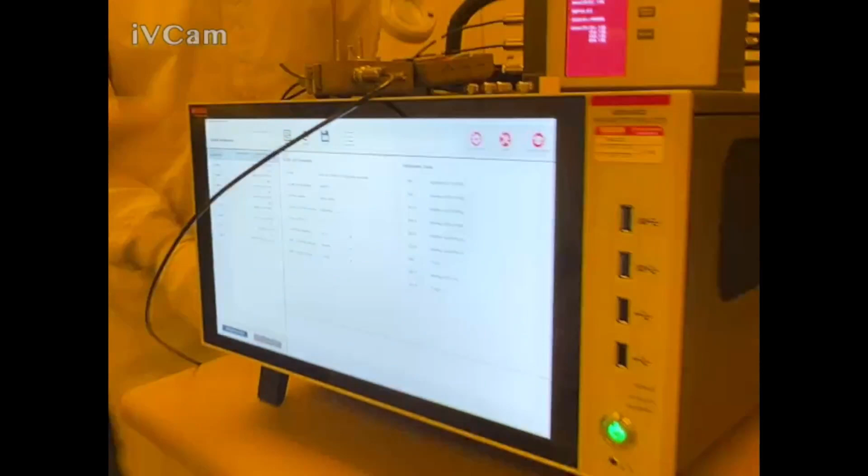Okay, that is right. So, looking at the icons here, there's several icons. Clarius, that's the main software. If you've used KITE, that's gone now. Clarius is the software you run on this. KCON, that's Keithley configuration, we got to do that once, and that's how we fix that error that popped up. So we run this KCON, and what it does is tell you everything that's in the machine.

So here's SMU 1, 2, 3, 4, 5, 6, CVU, and a ground unit. The little arrows mean you got preamps connected. Now the cool thing about this is I can select this guy, and if I think there's something wrong with it, I could run a self-test on it. I could do that on the preamps as well, open this guy up, go down to the preamp, and run a self-test. So I could test all the hardware out from here if I want to.

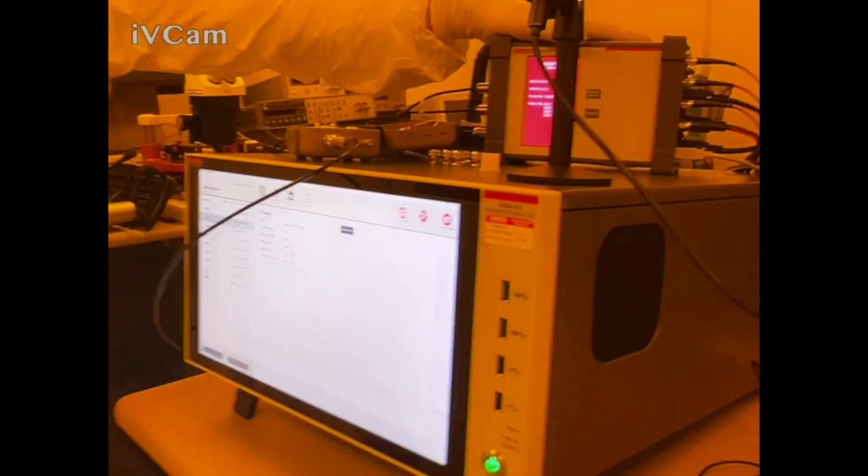So it found the CVU. It didn't find this, that's why it complained. It didn't find the CVIV. So what we got to do is say update.

So what we'll do—oh, and we got to disconnect our device or it'll blow it. It'll tell you that. So you say update, and it tells you make sure there's no devices connected, blah blah blah. And we'll run that. Now what it's going to do is update this, because the Clarius software utilizes the information from this so you can run your tests.

Okay, so you'll see it's going to add a CVIV in here somewhere. Nice. So now look, here's what CVIV is. These are the sense lines, not the 4-wire sensor. I'm not going to do any 4-wire right now, but look, now we got CVIV there. So now all your hardware is identified.

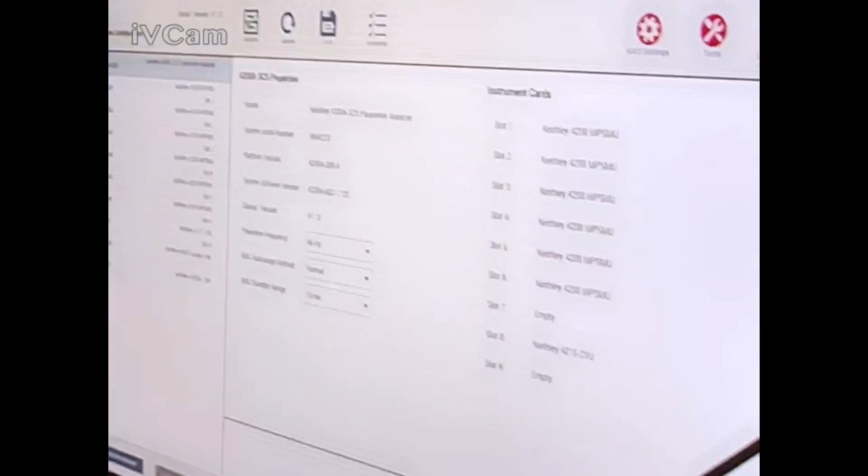So now what I got to do is hit save. You should never have to do this again unless you take something out or add something, and it'll squawk at you—it'll say oh, something's wrong. And then you just run KCON again, and you save it, and you get out of here.

And then there's K-pulse, you're never going to use that because you don't have a pulser. That's to generate pulses. KULT is an IDE for writing your own tests, so you can custom write your own automated tests. Most of the tests in here are already done for you, but if you want to write your own, you can—that's how you use KULT for that.

KXCI is for the GPIB. If you want to talk to this via another computer using GPIB, you'd have to invoke KXCI, which turns this from being a controller to being a listener—makes it just another dumb instrument, like any other instrument you got here. So you got to run KXCI, and it turns around the bus.

Okay, we don't care about any of this other stuff. The Learning Center, this is good stuff, there's a lot of information here. Before you call me, dig in here, because there's a lot of stuff.

There's all kinds of information in here for all the different types of products. Okay, so let's get out of there. So here, you've got all the manuals, the data sheets. There's even videos explaining things like grounding and shielding and all that. It's all in here. Okay, so I'm going to get out of there.

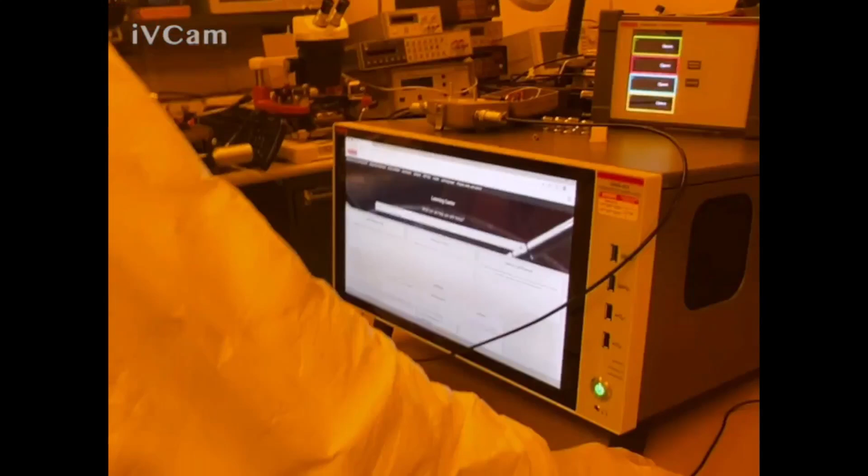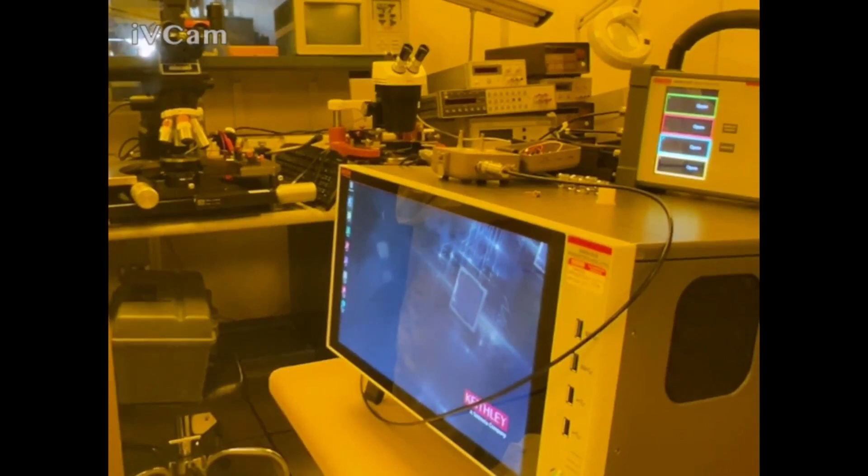Now, Clarius. That's the main software. I run that. Come on, run. There it goes.

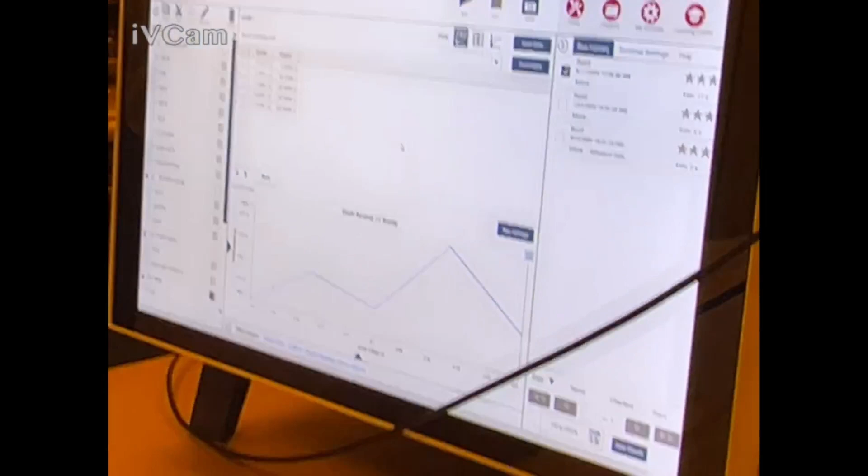Okay, this is where you're going to do your work in Clarius. Okay, so this is the guts of this machine. There's three things. I'll remind you, this is a touch screen. I don't like the touch screen, but it's all touch screen. It'll pinch and zoom like your phone, all that stuff, right?

So testing is 3 steps. You're going to select what you want to do, you're going to configure the test, and then you're going to analyze the data. Okay, so it's a 3-step process.

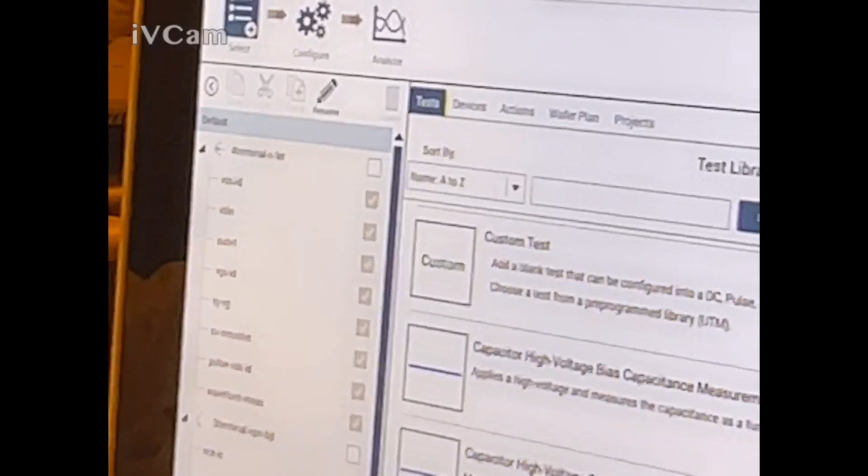So first thing you're going to do is you're going to select. Now, I've got a project already set up over here. It's called the default project. You can create your own. The default project has all my demo devices, right? So that's why it comes up to default.

So VDS ID, yeah, so you've got your VDS ID, your threshold, linear threshold, your sub VT, you've got VGS ID, IGVD, you've got CV for a MOSFET, which is gate capacitance. You've got pulse, which you don't have the hardware for, so you can't do that. And waveform measure, you also need the hardware for that.

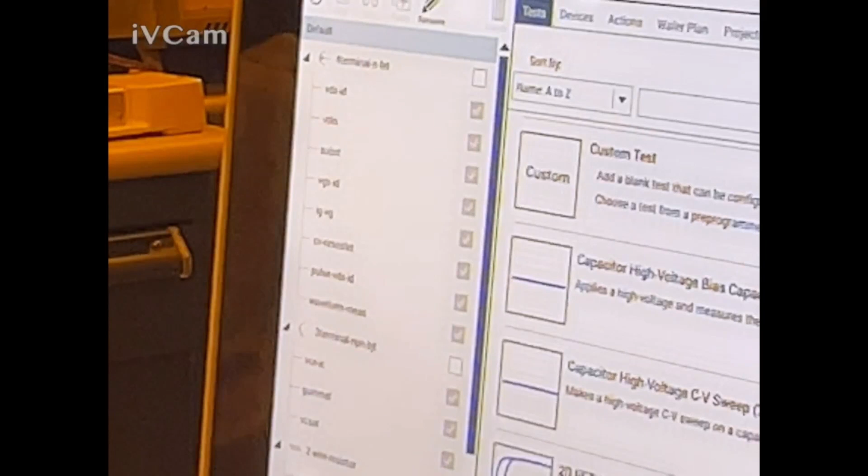Okay, so what I can do with this project is I can set this up however I want. Mine is default, so I can have devices. You can see I've got different devices in there. And then under each device, I could have different tests. And I can put that all in one project, which probably doesn't make sense, but for this, it makes sense.

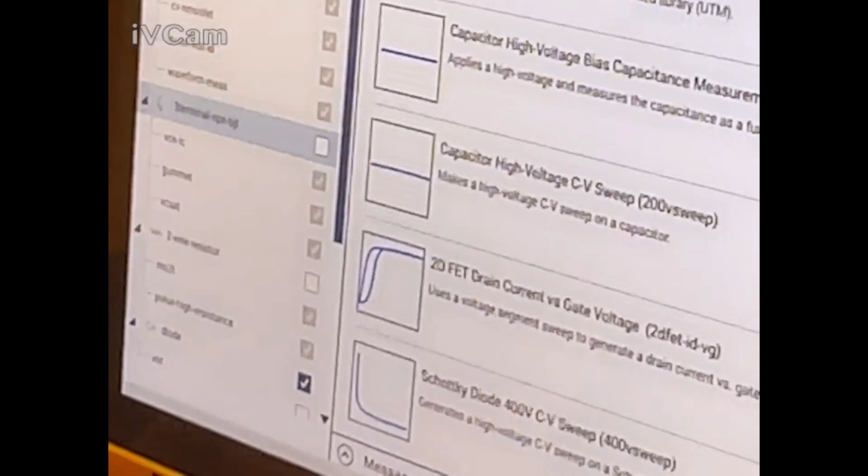Typically, you'll have a device you want to test - that'll be your project, and you'll put all your tests under it. You have another device, you'll create another project. So you have diode, two-wire resistance, you have diode, capacitor.

Okay, so this basically covers, this is an example for all the different types of tests you're going to be doing. Do you have something for inductor as well? Inductance is calculated, okay? And that's all done through the CV meter.

I can show you that, okay? So here's all your devices. Now, if I go to my 4-terminal FET and I go to VDS ID, that's usually where I start.

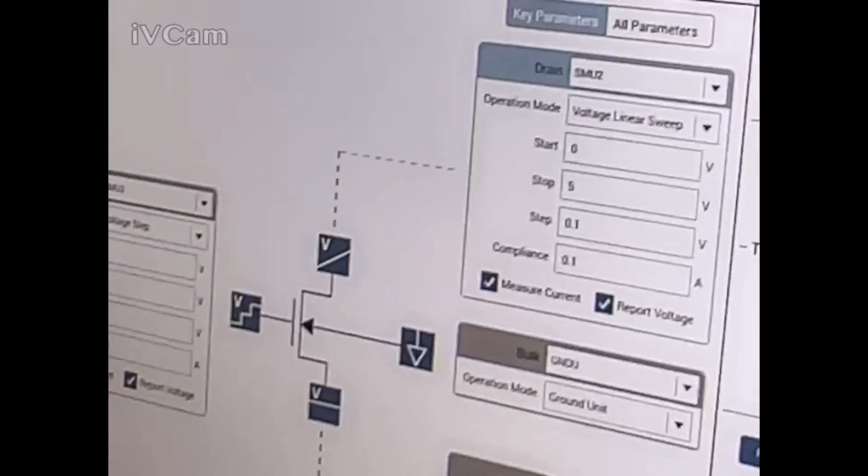And I go to configure. Now this is where I set up my test. Okay, so this means nothing, it's just a bitmap. I could put a picture of my kids there if I wanted to. It doesn't matter. What matters is what you do on each pin.

Okay, so I could test a resistor from this screen. It doesn't matter, whatever this shows doesn't matter. What you do here is what matters.

So now this has got a little icon that shows you kind of what it's doing. This is showing you a ground, so it's using the ground unit, which we don't have. We're not going to use that. So what I'm going to do is say none - I'm not going to use the ground unit.

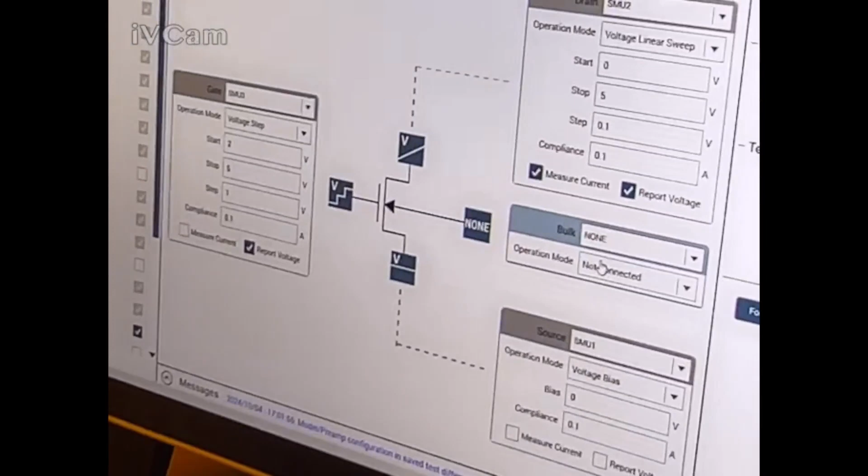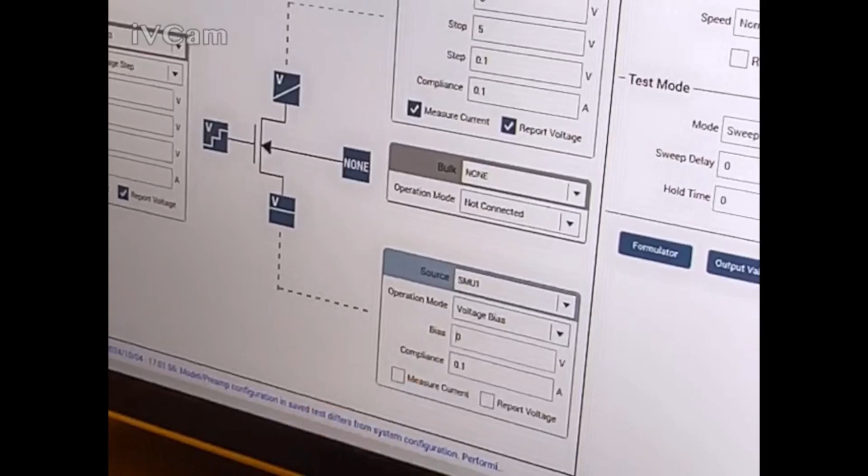This one's showing just a bias, right? So this is, remember I said use the SMU for ground, right? Yes. So voltage bias of 0 volts - that's why I don't like the touch screen when I'm demoing, I do that all the time. So I could set SMU1 to 0 volts, and I set a compliance. Now that's my ground, okay?

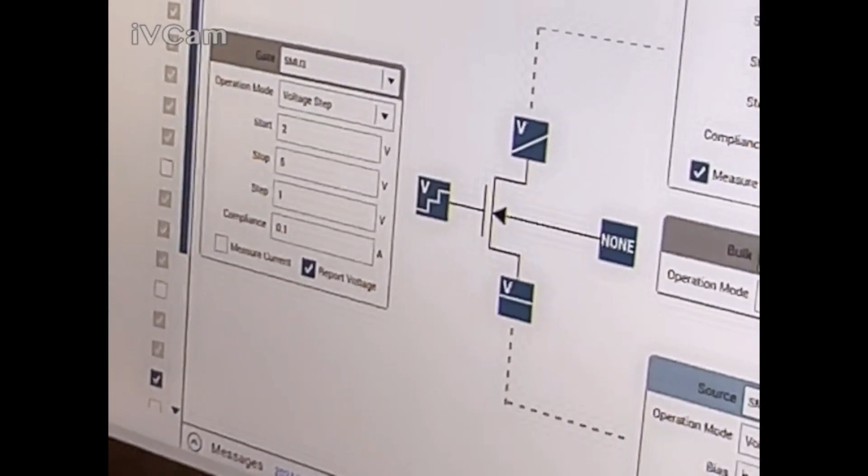This is showing me a step function on the gate, so this will give me a family of curves where you get multiple sweeps, right? At different gate voltages. And this is showing me a linear sweep. So for every one of these steps, I'm going to do a linear sweep, a complete linear sweep.

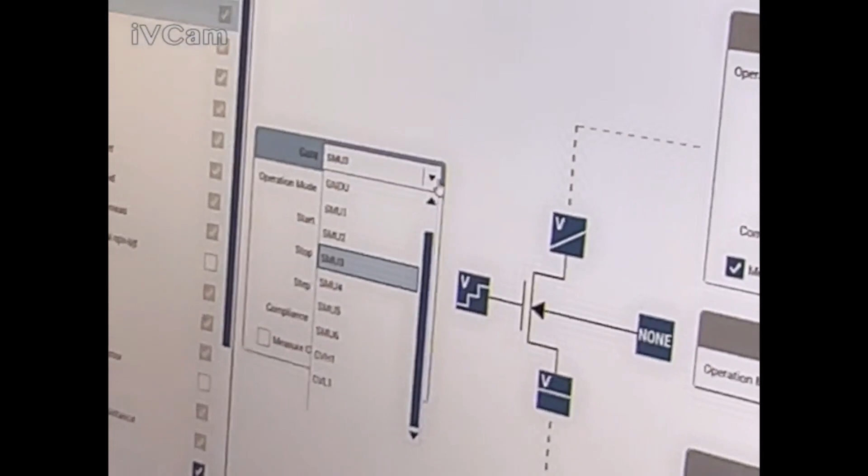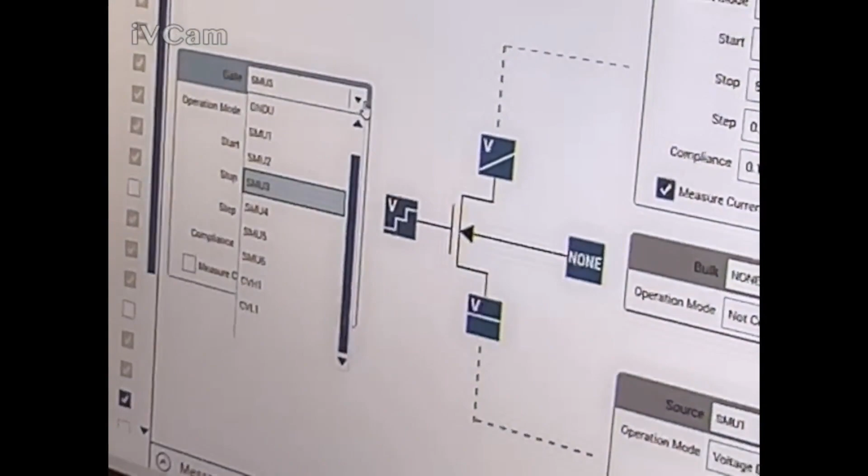So first thing is, what hardware do I want to tie to that pin? Now I matched everything to my fixture. This is something you got to be aware of. You got to make sure the proper hardware is tied to the proper pin of your device. So this is all set up for me. SMU1 is my source, so SMU1 goes to the source. SMU2 is my drain, so SMU2 goes to my drain.

Oh, I got to put my device back. What if you don't have that fixture, how do you measure a device then? Well, use your probe station. That's one way to get there, using a triax to alligator clip cable. Or there's several ways you can do it. You could put an adapter on here, convert the triax to BNC, then use a BNC to an alligator clip or something like that. However you gotta do it.

What is the easier solution? The easiest solution, I mean, you really don't want to do your testing that way if you can help it. We need correct results as well. It's nice if you got shielding. You just use cables in the air, if you're trying to make sensitive measurements, it's hit or miss. You might get something, you might not. So the best way to do it is to use some kind of fixture that has shielding. That's a fixture, you get it inside the box, you close the door, and it's shielded.

Now the other thing I didn't mention is you got to wire this up to your enclosure, because this will only put out 20 volts unless you wire it to your enclosure for safety. So it has an interlock. When the door's open, it shuts this off so that nobody can get hurt, because this could put out 200 volts, so it could hurt somebody pretty bad. So right now, if I tried to turn this up over 20 volts, it'll balk. It'll say, nope, sorry, can't do it. No interlock, because it's not wired.

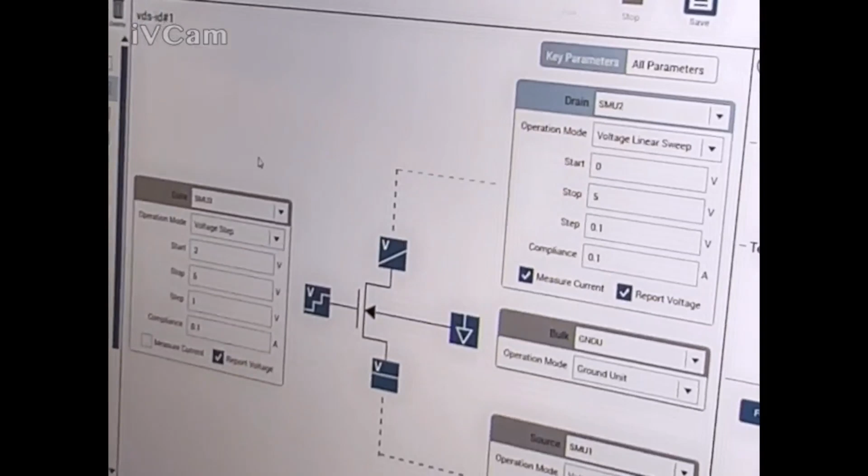So your enclosure has a switch in it somewhere, it should, right in the bottom. And that switch has to be wired into the back of here. There's a cable that came with this you should have, it's a gray cable, that's the interlock cable. If you don't have one, I can get you one. So this should be all set up to work, I shouldn't have to touch anything. So that's another warning to you: try not to mess with these because they work. Leave them alone. If you change something, don't save it, because you'll be overriding something that works.

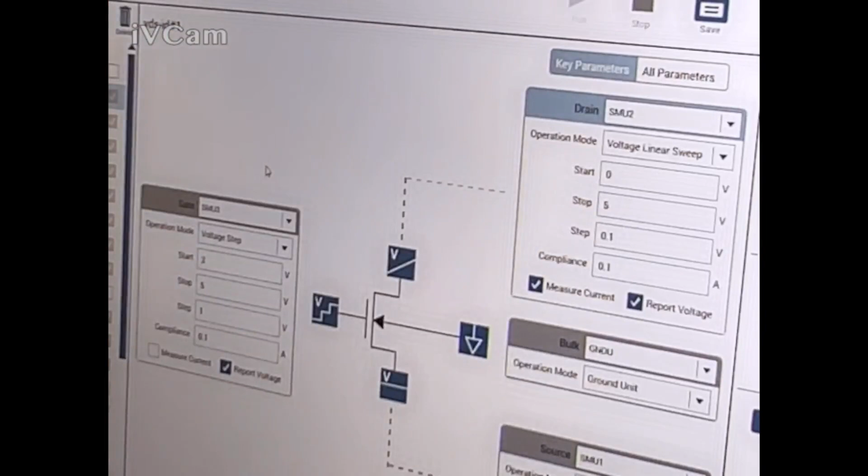So what do you mean? Don't change the numbers, don't change anything, leave it alone - start, stop, step, leave it alone. Besides, this is a good way to test if everything's working, because it's using three SMUs at once.

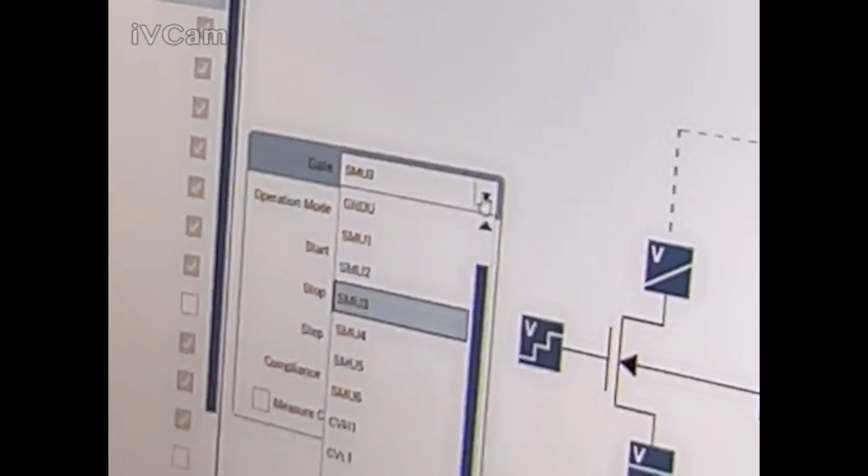So basically, here's what you got: you got your hardware, so this comes from KCON. So any hardware that's in this box, you can put on that pin. So you got to tell it what you want to put on that pin. I'm going to put SMU 3 because that's what I'm wired to. So I could put the ground unit, I could put any of the SMUs, I could put the CV high or CV low. But since I'm trying to do a VDSID, I want to put the SMU there.

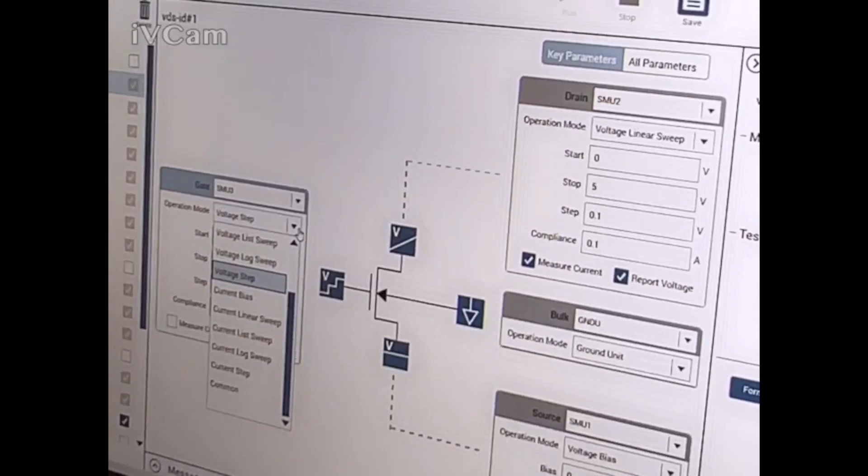So then this is going to be - I have a mode, these are all the different modes. So what we know about SMUs is they could be anything you want them to be. It could be a power supply, it could be a sweep generator, it could be a current source, it could be a voltage source, it could be a current meter, a voltmeter. So I got to tell it, how am I using that SMU? In this case, I'm going to use it as a voltage step. I could use it as a current step, I could use it as a ground, I could use it as a list sweep, which you put in a list of values, and it goes through the list.

I could do logarithmic sweeps. I could voltage bias it, which makes it a power supply. I could leave it open if I want. I could do whatever I want with this, but I want it to be a voltage step because that's what you do for a family of curves test.

I'm going to start at 2 volts, stop at 5 volts, with a 1 volt step. So that means 2 volts, 3 volts, 4 volts, 5 volts. I should get 4 sweeps, right?

Compliance, that's to protect your device. So you set a current compliance. If I'm sourcing voltage, I'm setting a current compliance. If I'm sourcing current, I'm setting a voltage compliance. Compliance is always the opposite function of what you're sourcing. So that just says the source will not put out any more than 100 milliamps, so it will protect your device. That's what that's for.

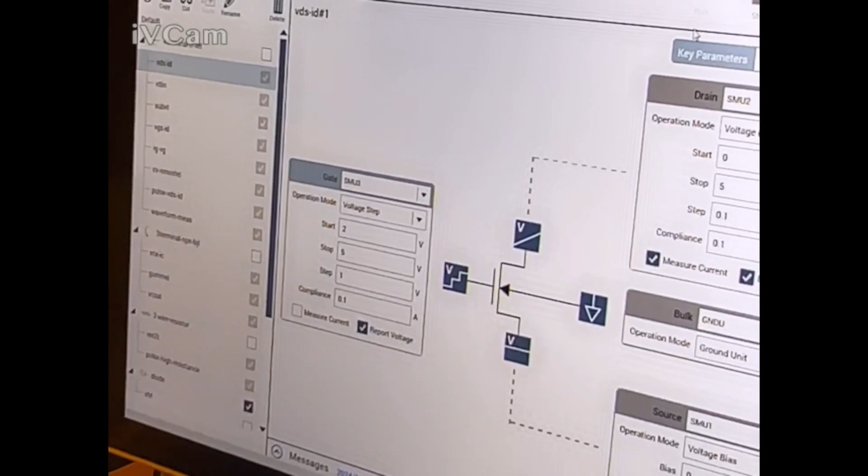Now, every SMU has 2 A to D converters on it per channel. So what does that mean? I could measure voltage and current at the same time because I've got 2 A to D converters. So I could say measure current and voltage, boom, it'll give them both to me. I'm not going to do that here.

Why? Because what do we know about gate current? It's very small. What did I tell you about settling time? It's going to take forever. So if I measure that current, I can do it, but we'll be sitting here for 5 minutes for this test to complete. So I'm not going to do that. We don't care about gate current, right? We don't really care about it. What we care about is drain current. So over here in the drain, I'm going to measure current and voltage because that's what I care about.

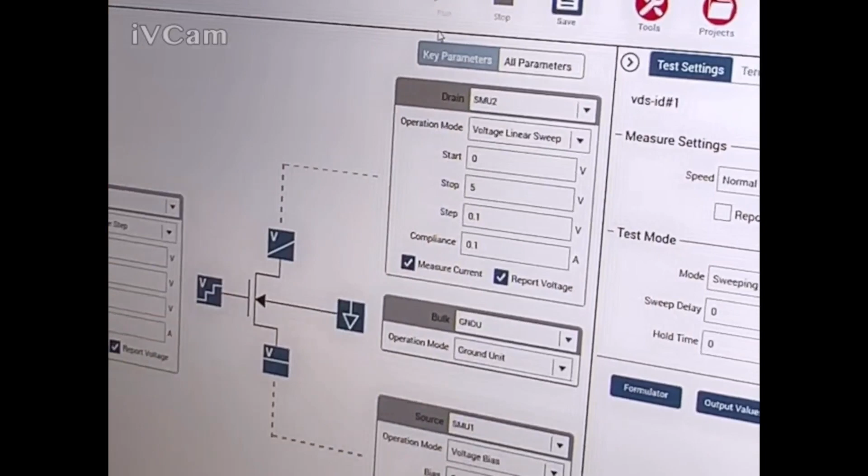And I'm going to do a sweep from 0 to 5 volts with a 0.1 volt step. We want more resolution on the drain current because that's what we're concerned with. And then this guy is just a ground - I don't have to measure anything. This is just a ground. There's no reason. I could if I wanted to, but there's no reason to.

I talked about the speed. Here's the speeds - these have to do with the NPLC settings I talked about. When we say normal, that's 1 NPLC, 1 power line cycle. Fast is 30% faster, quiet is 30% slower. Custom, you can set it to whatever you want.

Okay, sweep delay and hold time. Sweep delay is delay that it adds after every source change. So every time it steps a voltage, it's going to wait that long. That's like if you've got a lot of capacitance on your device or in your fixturing or whatever, you might have to wait a little bit for it to settle. So you can do it that way, or you can do it with the NPLC.

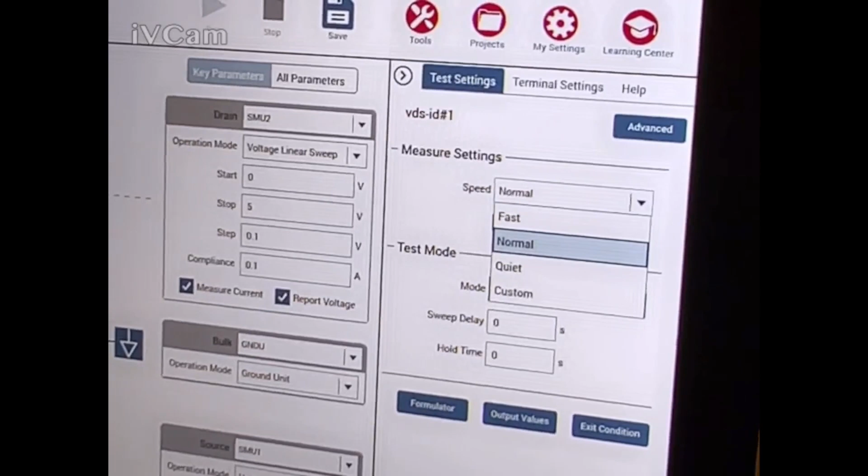It depends. So you're sweeping the gate... no, we're stepping the gate. We're stepping, the sweeping is on the drain, okay... sweeping, hitting the drain, the whole drain. Okay, so for every step, we're going to have a full sweep. Okay, I see. Okay.

Hold time is time before any of the test starts. At the beginning of the test, you can set a hold time.

Now, the total time of your measurement is 3 processes. There's source timing - there's overhead to set the source up. I don't know what that is, it's indeterminate. We don't care because this is DC. We care about current and voltage, we don't care about time. So there's timing related to that, and it's going to vary based on range. That's why we don't care - you can't keep track of it.

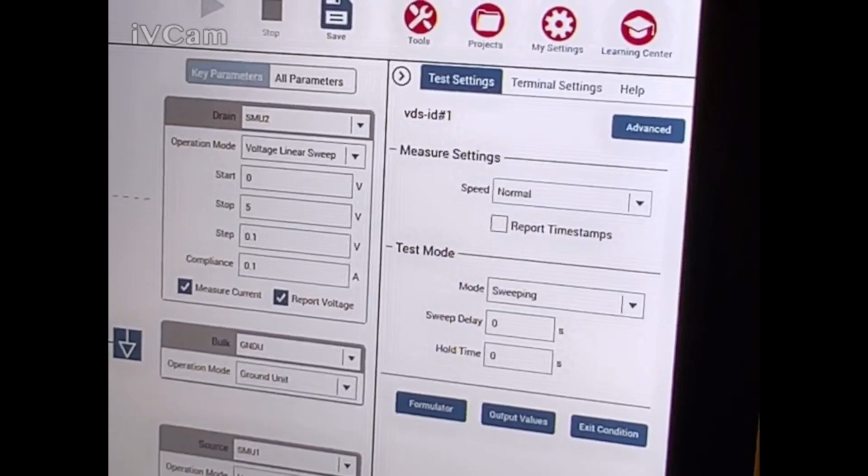Then there's delays that you add, like this sweep delay, hold time. Then there's the NPLC, the measurement aperture. Those 3 together give you your total time. Now, if you want to know what that time is, simply hit this: report timestamps. And what it'll do is put a timestamp on every measurement, so you can see how long it's taken for every measurement. That's the only way to do it with the DCSMU. With the pulser, it's much slicker and much nicer. But with this, timing's kind of secondary. We don't really care about timing, but sometimes you do care.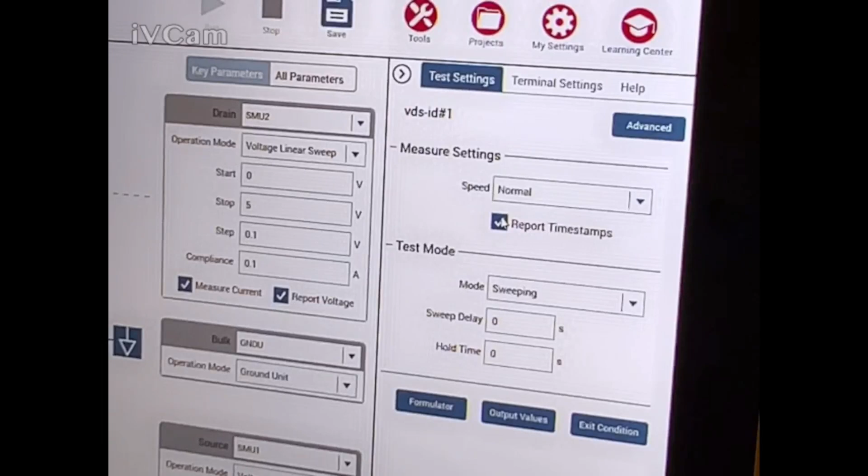If you set the timestamps up and measure very quickly to where you're getting that noise, you'll see the current settle. By looking at the timestamps, you can see how long it took to settle, and you know how much delay to add if you need to. But as long as you keep speed normal, you probably don't have to worry about anything. You're probably good.

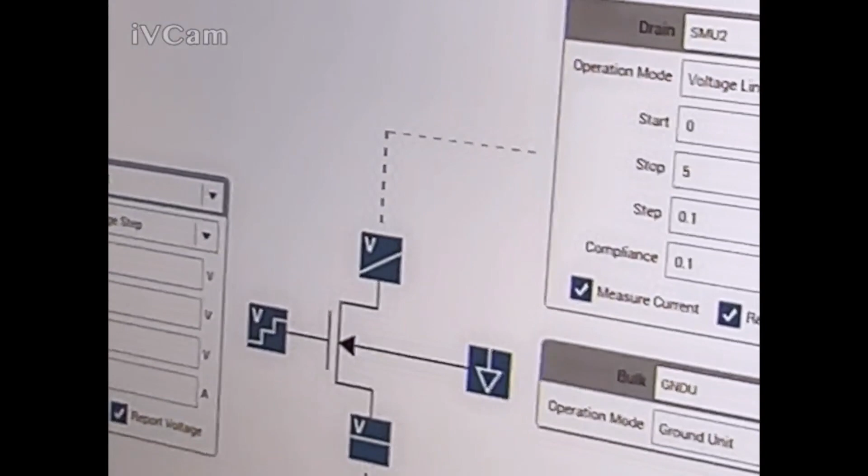Bulk, you said earlier it should be none, right? Yes, it's none or ground. Oh, it's the same? Oh, that's because I powered it down, I forgot to change it. Yeah, it'll fail when I run it, so I can change it to none. So now we got nothing on the bulk. So this should run now. Now I could go to analyze.

This is what I should get. I should get four sweeps, right? I'm gonna run it. So what is that curve again? Where did you get that curve from? From a previous measurement? Yeah, it's factory installed.

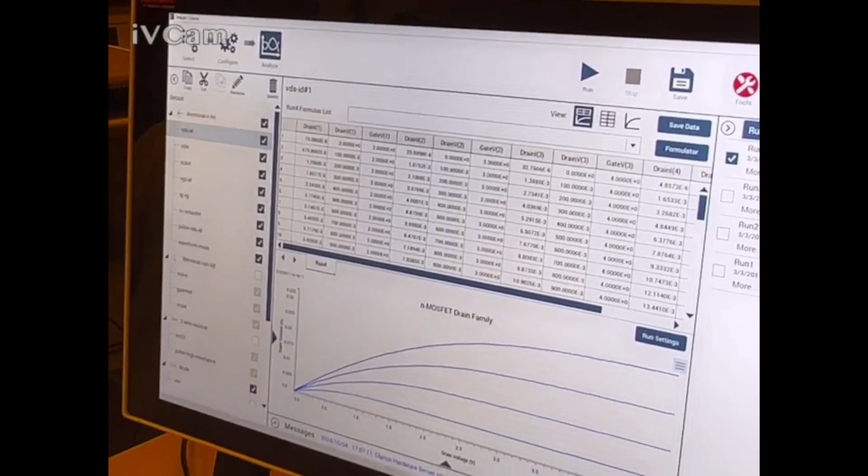I see. Okay, so I have to have these selected in order for them to run. Now, if I go up here to 4-terminal NFET, I'm gonna show you something. This is actually gonna fail, and I'm gonna show you that, but I'll explain it.

This is gonna fail. Save changes. What did I change? So even without hitting run, it took a measurement, right? No, just analysis, that was already there. So it keeps - see, it was run 4 times. Nothing ever gets thrown away.

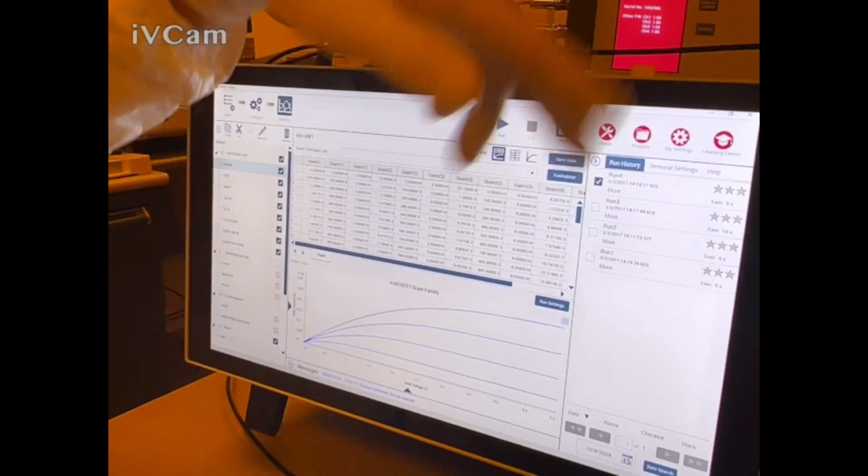So this was run at some other time, maybe at the factory, or something, right? The data's just there. You can turn it off by just clicking this button. You can turn it off. Okay, so that's what we should get, but we're not going to get it, and there's a good reason for it. I'll explain it because we forgot to deal with this. Ah, that's an error.

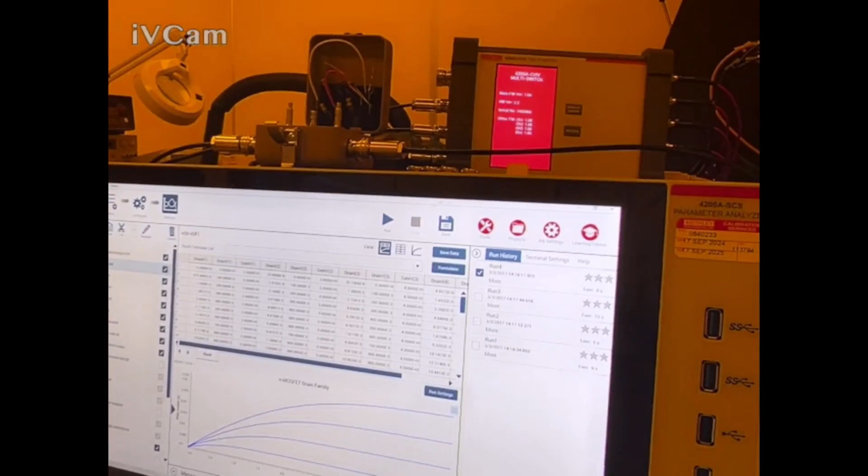So that's in the loop, and if I run this now, it's not going to give me anything. Watch. Yeah, I was actually - it's not going to work. I'll show you what we got to do. See, it's just junk.

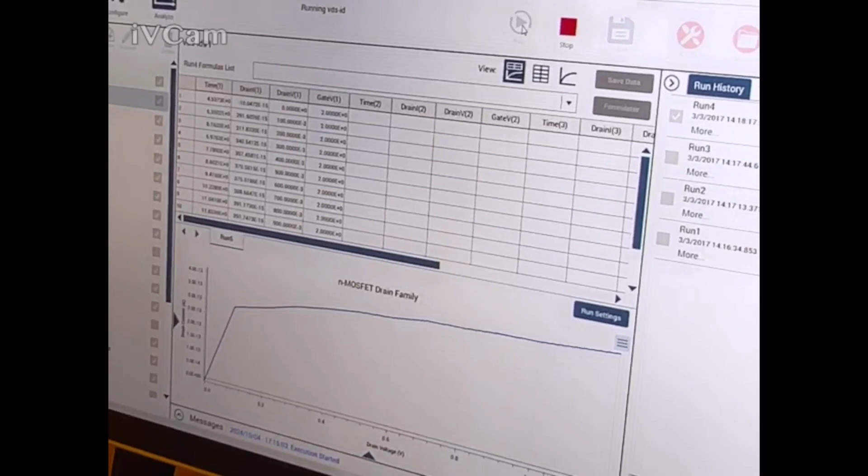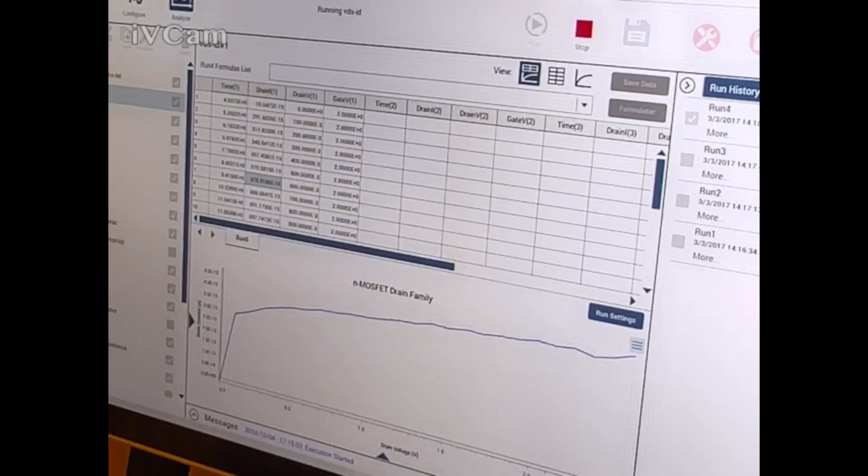Notice it's taking long because look at the current - it's femtoamps. There's no current. So that's why it's so slow. That's why I didn't turn on the gate current. So let's stop that. But okay, anyway, we got to set this up.

Oh, actions, there it is - CVIV, it's got to be configured. CVIV configured. Okay, so what I'm going to do is add that, and I'm going to put it up here. I'm going to put it right before the test. Okay, now I'm going to go to that.

Okay, so we have to tell it how we want to use this. Right now we want to use it in SMU mode, not the CV meter - we want to use the SMUs. That's your choice, CV or SMU, right? So we got to tell it what we're going to do. Channel 1 is SMU, channel 2 is SMU, channel 3 is SMU. We don't have a 4, so we say open - 4's got nothing. 2-wire or 4-wire? We're 2-wire.

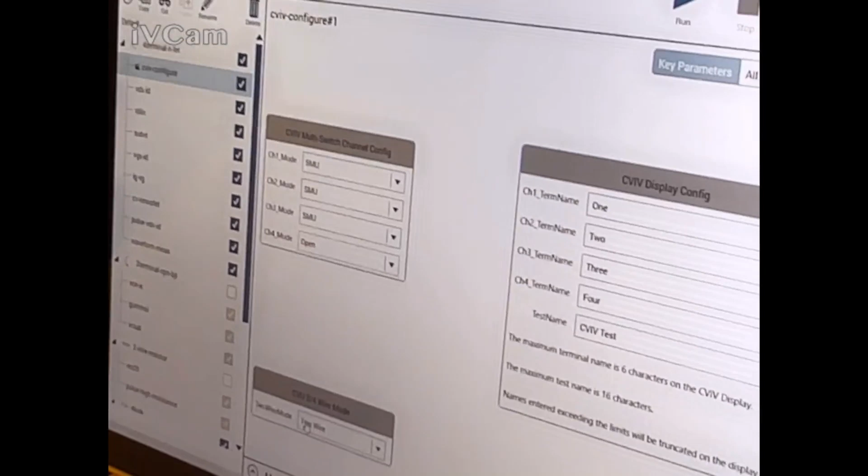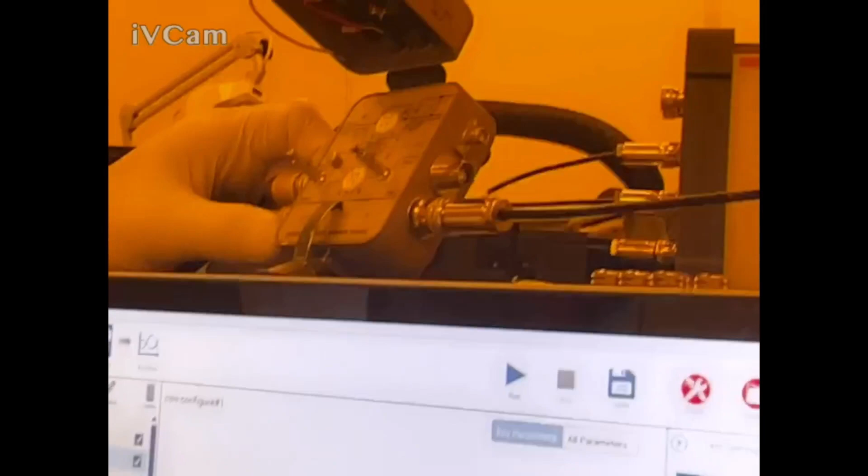Now, the other cool thing here is I can go over here and say channel 1 is my source, and I can type in here, source. Channel 2 is my drain. Channel 3 is my gate.

Okay, and channel 4 is open. Not using it. We have to do that every time, right?

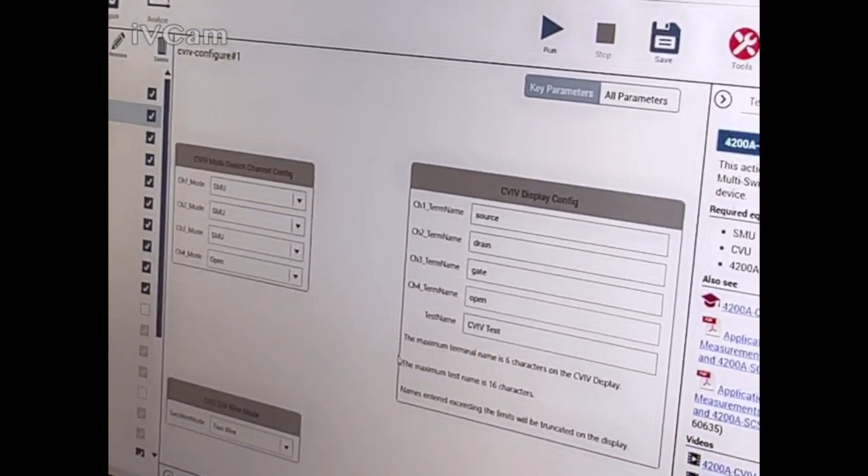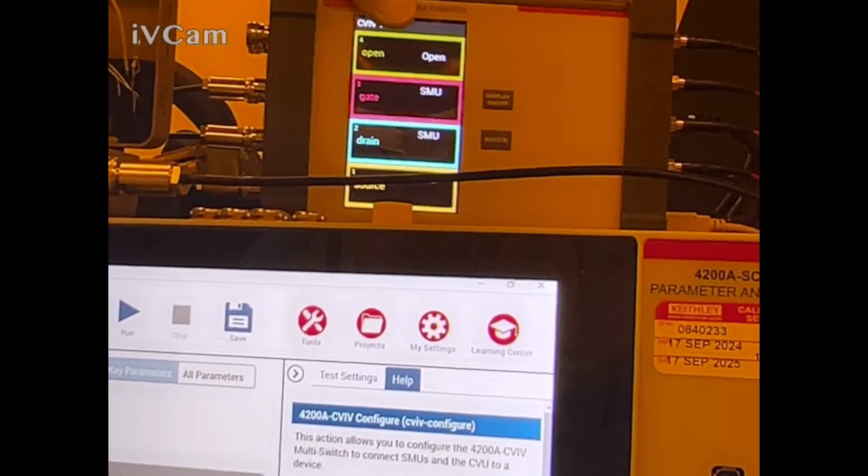No, no. I'll show you. I'm going to show you this. Another 2-wire. So now if I run this, watch what happens to that guy. Okay, now it knows. Now you can see exactly what's going on.

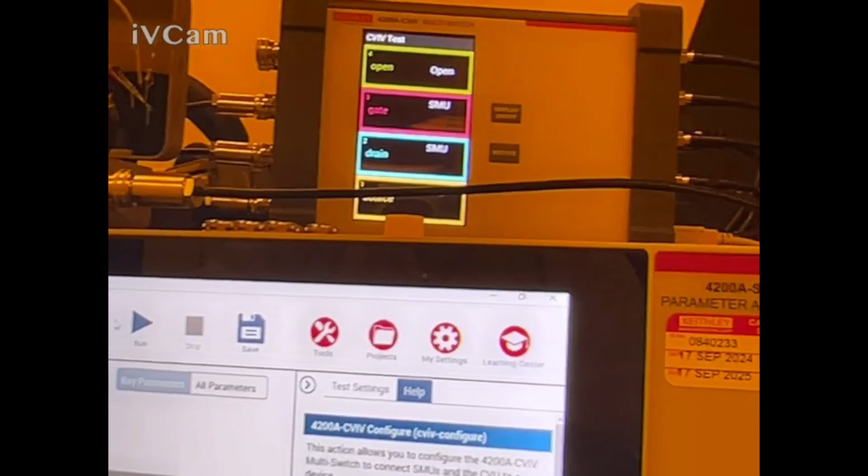So your channel 4 is open. You got a SMU on the gate, a SMU on the drain, and a SMU on the source. Now I can use it. So now that test is there. I would save that with my project, and now I don't have to run it again unless I want to change device or test type.

What if I wanted to go do a CV test now? I got to reconfigure that. But I'm going to show you how to do that in a semi-automated fashion. So now that's set up.

So now I can go back to this test, and I can run this test, and it should work. There it is, yep, okay. Now I'm going to show you something. Say you just walk up, everything was powered off, this it doesn't know where it's at, right? Everything's powered. See how fast that ran? If I turned on that current, it would run forever.

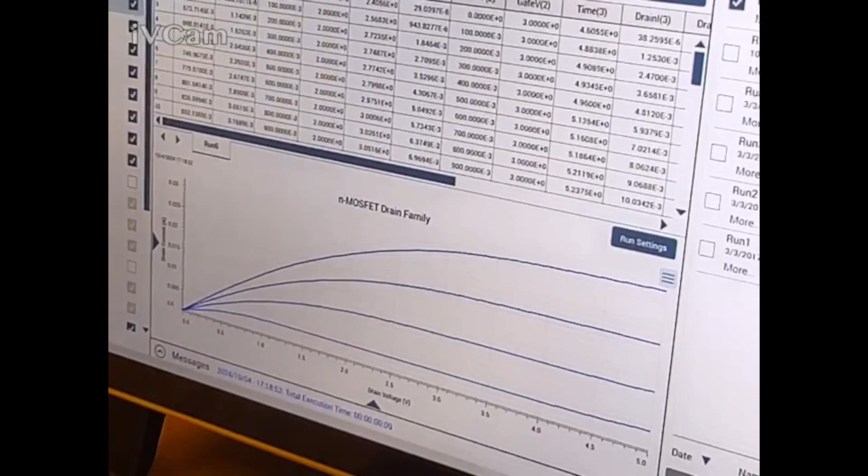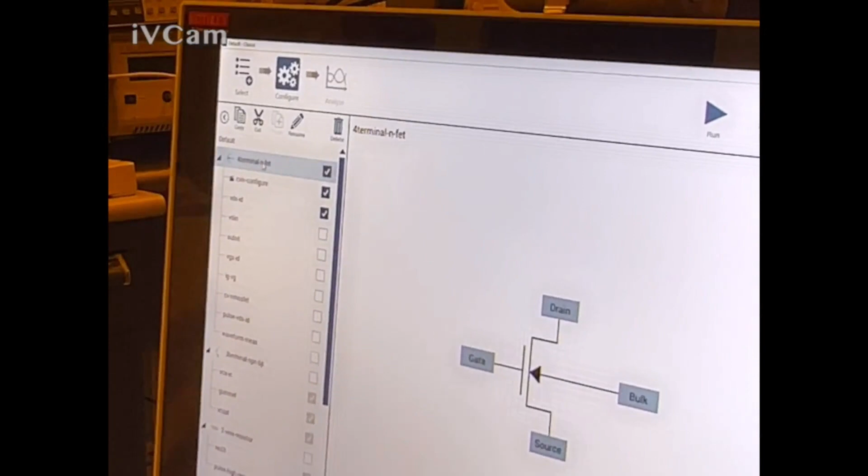But now what I could do is go over here and leave these 2 checked, and turn off all these other things under that device. So if I run at this level, it's going to run everything that's checked, so it's going to do the configuration of the CVIV and the test. Make sense? Then I could put another configure, do a CV test, and run them all 4, one after another, or run them all together.

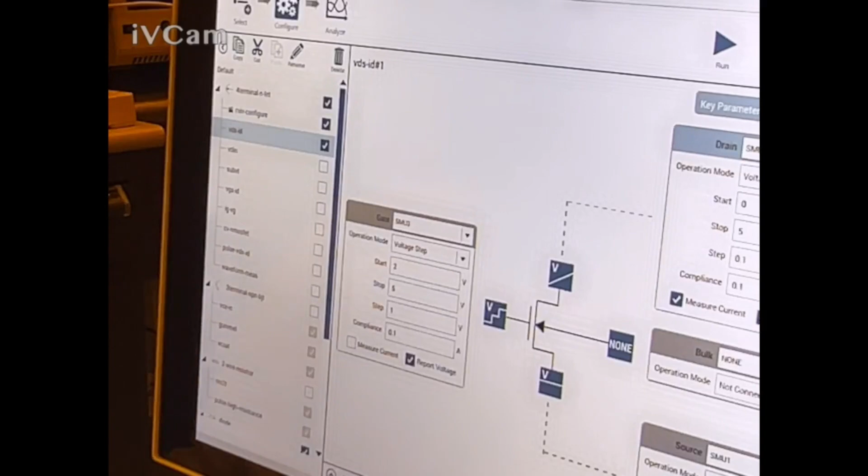It will do the change for you, won't it? You won't have to change any cables. It'll run the DCIV test, reconfigure the CVIV, and run the CV test. So now instead of running it at this level, I'll go up here and hit run, and now it's gonna go through both of these tests.

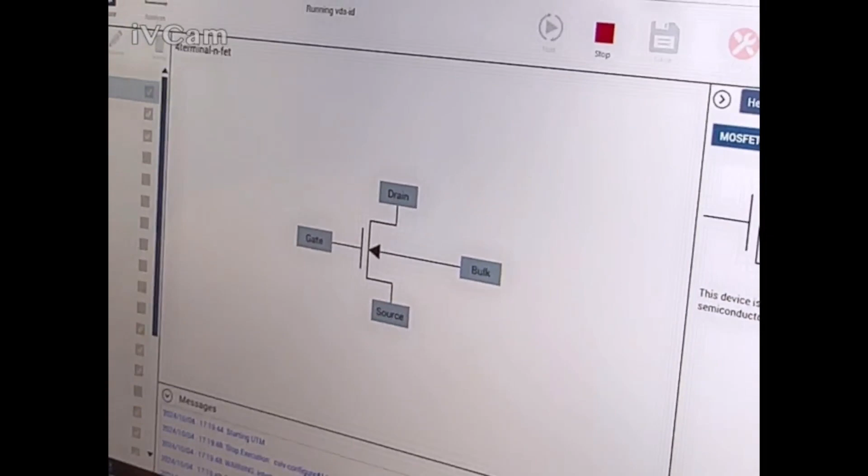I don't have, if I pull this up, you'll see what's going on here. See, 200 volts disabled because we don't have that. So now what's happening is it's updating these tests that are run. So it's running VDSID. So if I go to analyze, now we got another run, and there's the data.

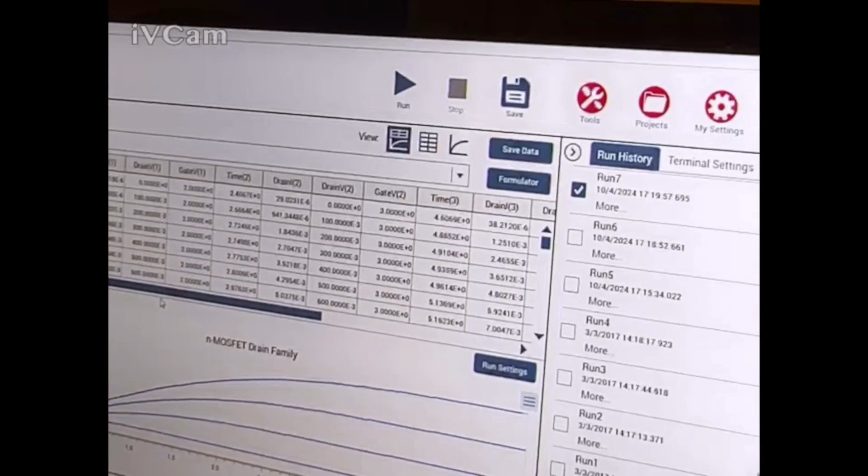So now I could compare runs. I could, if I want to compare the last run to this run, boom. And you can see, I can zoom in on it to see how close they are. They're pretty darn close.

Can you change the color? Oh, it's dotted. I see. You can change, yeah, you can do all that. There's a ton of graphing features in here. I'm not going to go into that because it's just like Excel, right? You can do all the same stuff you could do with Excel.

So a lot of people would take this data and pull it off to Excel. You don't need to because there's so many options in here. You could do line fits, linear regressions, searches through the data to find points you look for, like what's the voltage at this current. Things like that, you could do a lot of stuff. So there's really no reason to go to Excel, virtually no reason, because you could do so much in here.

So what I'm going to do, I'll show you a test that utilizes that. This VT-Lin utilizes a formulator. Just a quick question.

So over here, when you take CVIV configure, and VDS ID, so it takes CV and IV both at the same time, or just one after another? No, one after another. But CV configure is important every time, right? Yes, okay, because IV that's important too. If you're doing CV and you want to go back to IV, you got to reconfigure it for IV, right?

So you could do it a couple different ways. You could do it, like I said, by checking and running them in a sequence, or you could just go click on it and run it yourself. So if I'm doing CV and want to go back to IV, all I got to do is go back and run this test, and just hit run, and boom, now it's back to IV. Now did it also do the transfer back to IV? What's that?

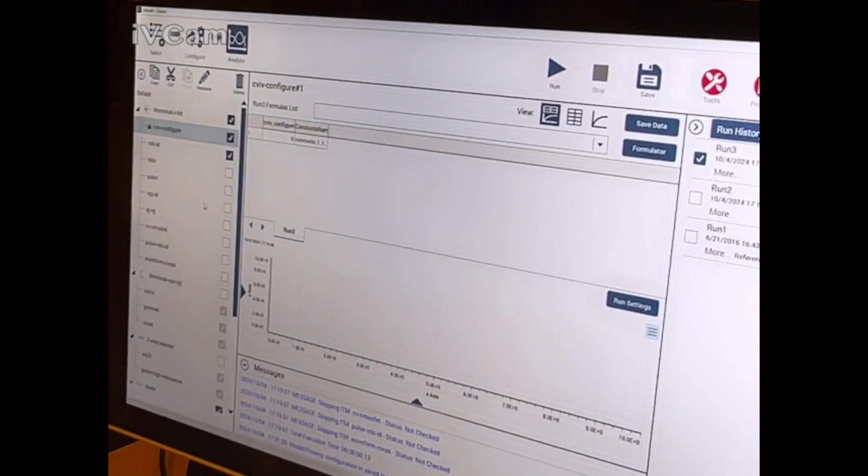Transfer characteristics in the last run? Yeah, you're getting ahead of me, man. Okay, slow down, I got it.

Okay, so here this is now where you can do formulation. So what this is doing is it's doing some calculations off of the data that it generated. It's doing a line fit between these two points. Now what's cool is I could grab this and slide it up and down, and it changes the slope and changes the data.

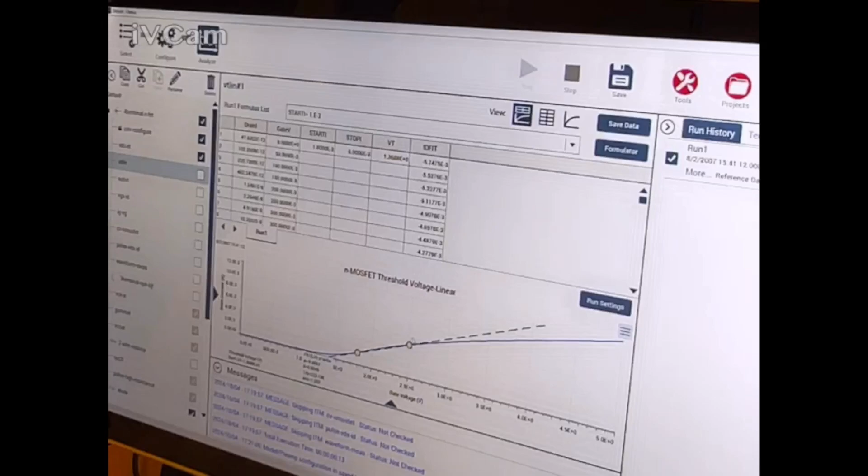So if I could play with this, but to set this up now, I go over here, and I go to test settings, and I go to formulator. Now the formulator, this is where I could write formulas to do all kinds of cool stuff with my data.

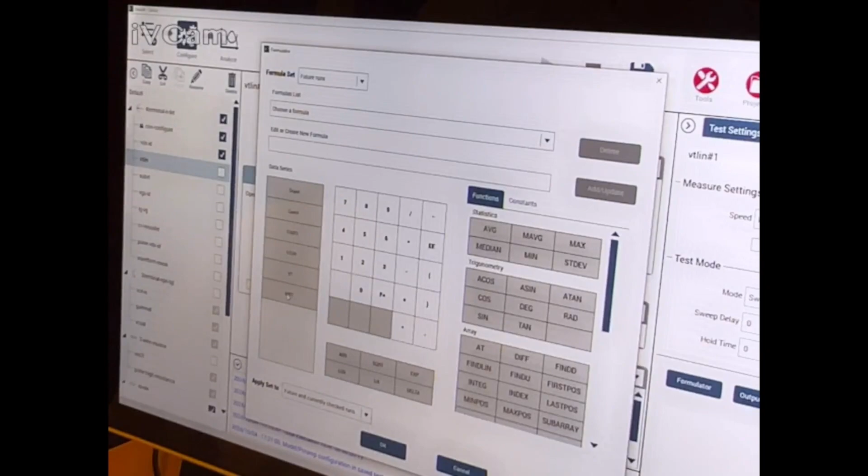These are all the data points that are on this test. The ones that are standard are the drain current and the gate voltage. These other ones were formulated: start I, stop I, VT, ID fit. So that means there's a formula for each of those. To find them, you go into here.

Here's all the formulas. So start I, this comes from the data sheet of the device. The vendor will say, to find the threshold, you want to find the current, you want to find the voltage at 1 milliamp, or you want to find the slope between 1 milliamp and 6 milliamps. Those were the two dots, right?

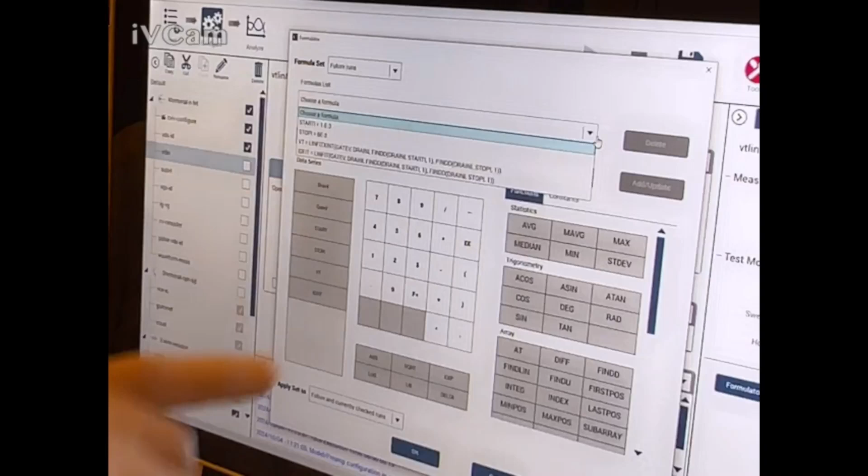So this is setting this all up, and then this is where it finds it. And then the VT is where it finds the threshold, and this is the formula for that. What all this means, you're going to have to go figure out in the manual, because I don't have time to go through all that.

But this you can almost read. It's a linear fit, on the x-axis using the gate voltage, drain current, and it's finding a drain current based off the start current, and I don't know. You can calculate the threshold voltage.

Yes, you can. There's a lot of things you can calculate here automatically. Here's some of the things it gives you: it gives you some statistical stuff here, average, max, min, standard deviation. Gives you some trigonometric functions. It gives you array functions. It gives you all these line fit functions.

You could even do FFTs on this thing if you want to find frequency domain information off of the time domain. So lots of stuff here. All of this is in the Learning Center. You can figure out how to work all that. There's also examples, program examples to show you how.

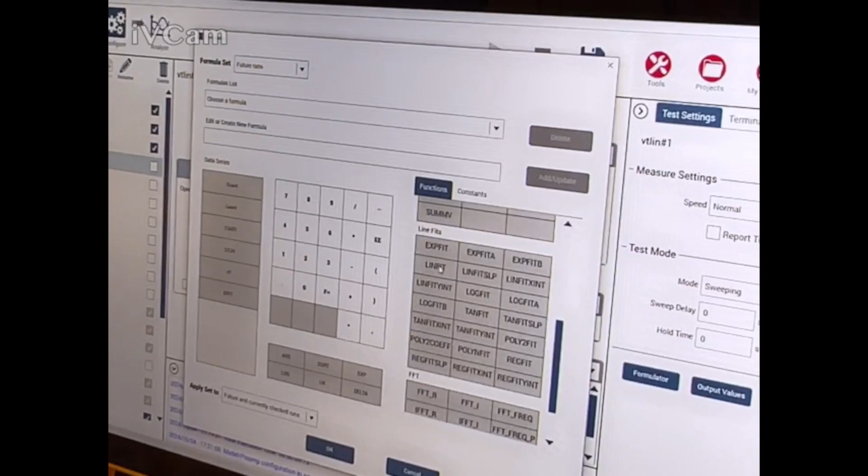Can we have this stuff the Learning Center copied? Is it a PDF file? The Learning Center, there's a website, it's huge. You can get it off our website, or you can download this Clarius software on your PC, and then you have the Learning Center that way too, and that's free. The whole software is free. You can go on our website and download it.

You won't be able to run any tests, but you can have it at your desk, and then you can have access to all this. So you can build your tests, your projects and stuff at your desk, and then put them on a thumb drive and bring them over.

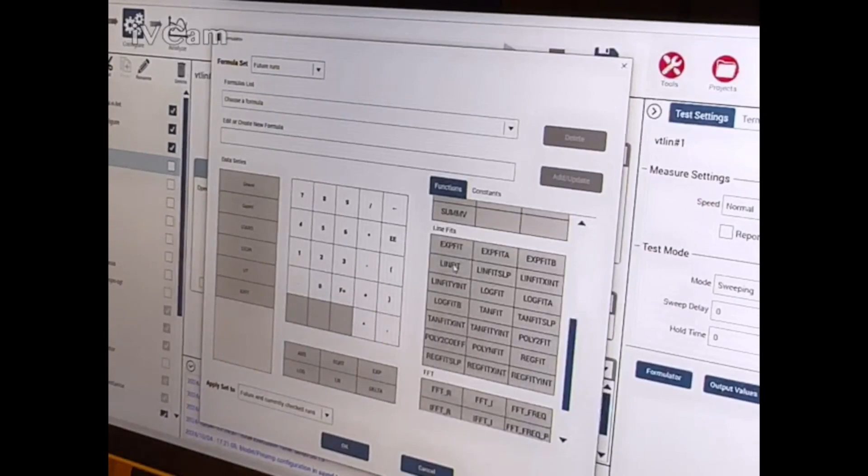One thing you should understand is you can't hurt this. Even if you tie two SMUs together, they could sink the same amount they could source. So an SMU is 4 quadrant, and that's it. That means it could source and it could sink. So if it could source an amp, it could sink an amp.

So you could plug two of them together and drive it full bore. The other one can handle that. In fact, it loves it.

It'll tell you what it's doing. It'll tell you, I'm sinking an amp, right? It'll tell you exactly what's happening. So you can't hurt this stuff unless you tie two SMUs together and gang them up on one. Then you can have a problem.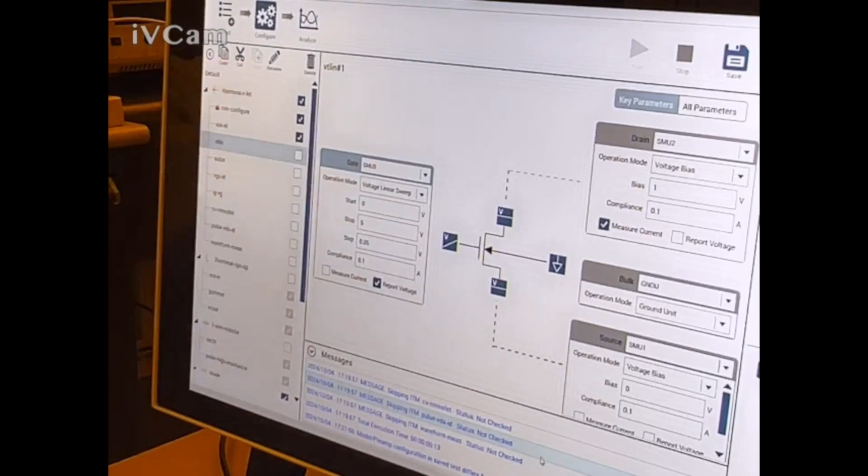But these tests that are in here, we set them up for you. They're called ITMs, interactive test modules. There's two different types of test modules in here: an interactive test module and a user test module. The interactive test module we developed, we wrote this GUI, we set all the defaults, we set this all up for you. We gave you what we think you need. And then you could select from what's here. Period. Done. End of story.

If that doesn't work for you, you can write your own, and that's a user test module. You do it in C++. We give you the IDE so that you could write your own code. You could set the limits, you could write the GUI, you could do everything, right? That's a little more advanced.

If you get to where you can't find a test that does what you need, now you got to write it. And when you get to that level, you can do anything, including break the machine, because now you got access to the full power of everything this machine can do in software. You can do it all.

So I'm going to show you how you can tell the difference between an ITM and a UTM. This is an ITM. A UTM would show you a DLL over here. It would show you... so this is an ITM. Thank you. Now, let's go back to where I started.

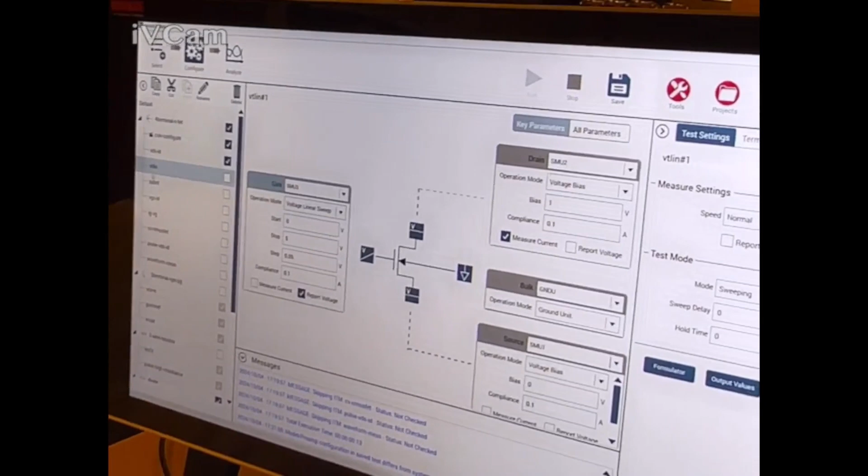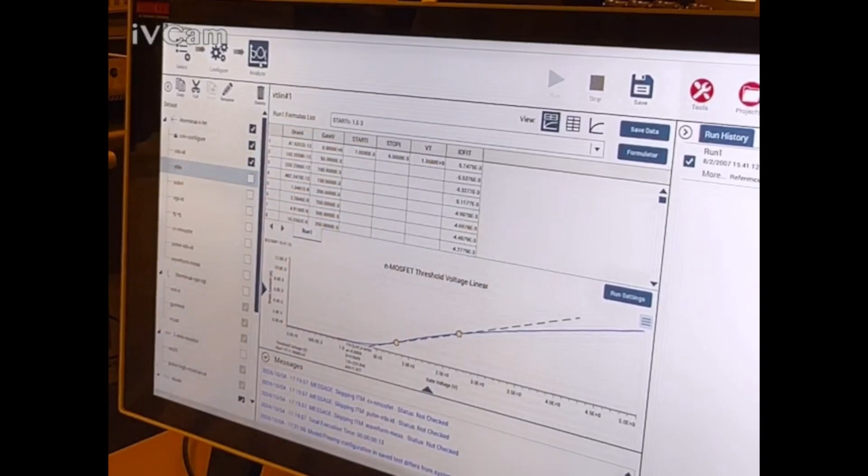So over here we're looking at the formulator, right? So this is where we could do some custom stuff. Whenever you write a formula, it adds another column to your data. So you can see the start current, the stop current, the VT, and the ID fit. The only two that come with it are the drain current and the gate voltage.

But when you write formulas, it's going to add columns. Now your formulas can be written so that you can get one output based on the aggregate of all the data, or you can get a point for every point, depending on how the function's written. So that's very, very powerful. This allows you to do a lot of great stuff.

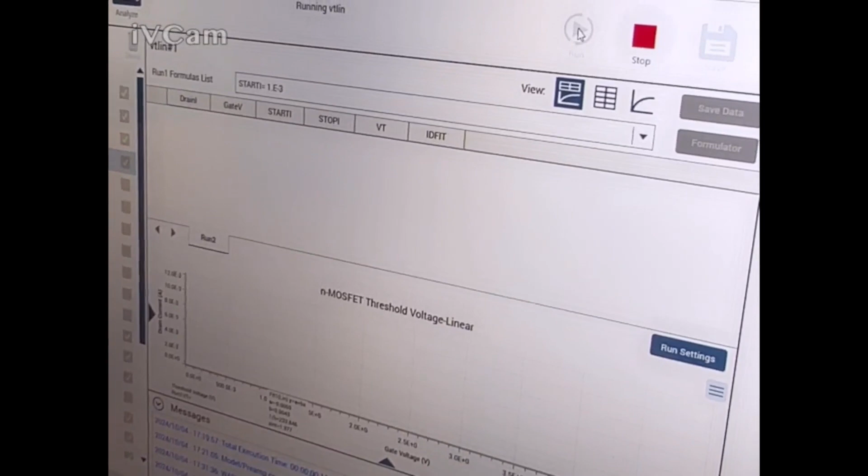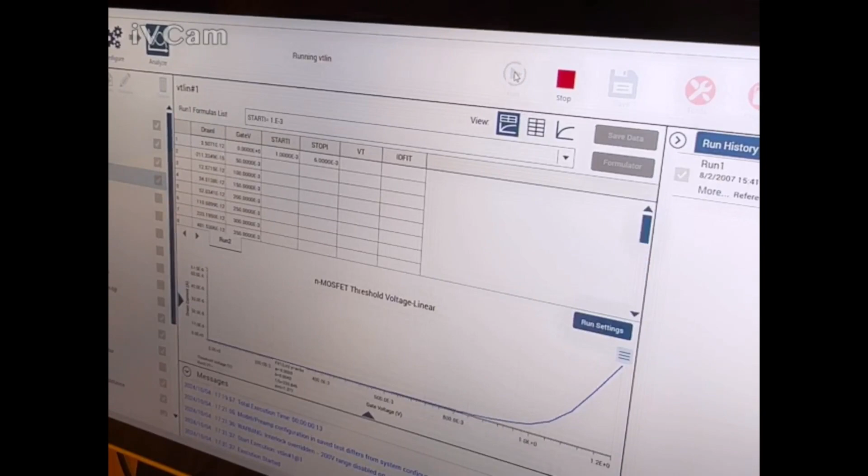I can run this, it should work as well. Let's see, I gotta select it, and then I can run that. This should work on the same device. So what are you running now? Yeah, running the VT linear, threshold voltage linear. And then it's going to do the formulation on that. Boom, there it is, see?

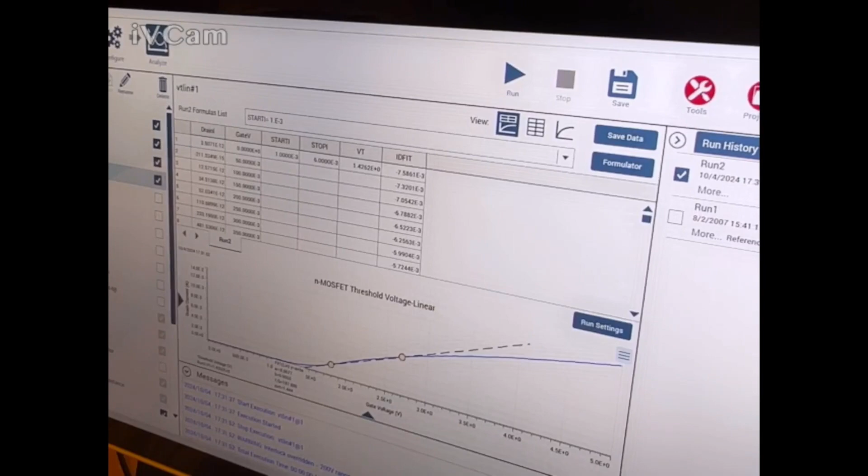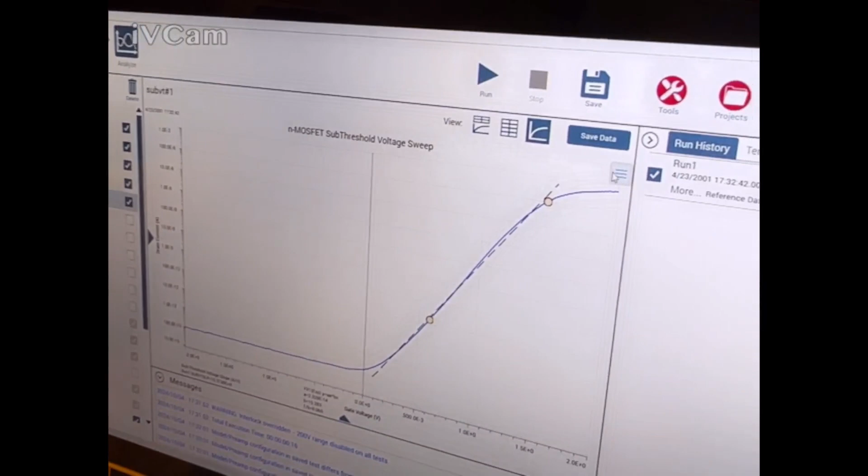Okay, it's pretty nice. Then there's this guy, sub VT, very, very similar test, so no reason to talk much about it. But I can look at just the tabular data if I want, or just the graphical data if I want. I can do all kinds of stuff. Here's where I can set up the data series, the definitions of the axes, and auto scaling, and I can do dual graphs, or I can have up to 8 graphs on the screen if I want, actually. So you can have 8 tests.

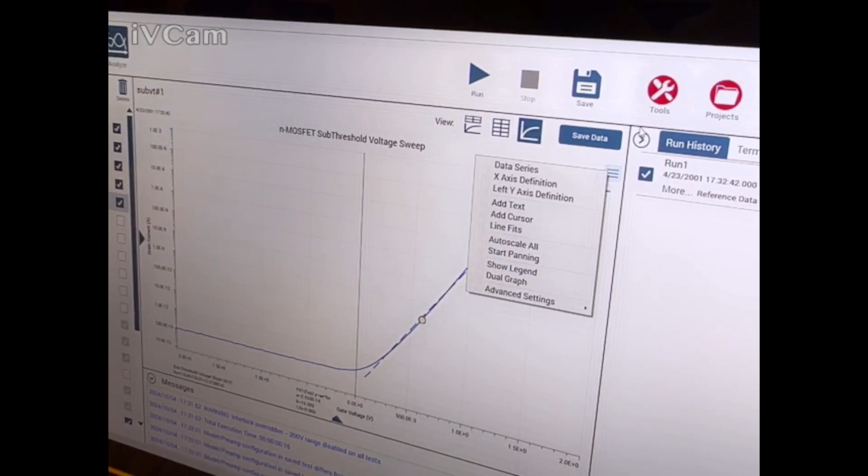You can run them all one after the other and display all the data all at once. Then I could loop. I could set up looping at the top level, or I could say run this. If I want to beat my device up over a weekend when I go home, want to stress it, I can set it up to over-voltage the gate, for instance, and do that all weekend, and then come back on Monday and characterize it with regular voltage, see if it damaged it. Things like that. So a lot of stuff you can do here.

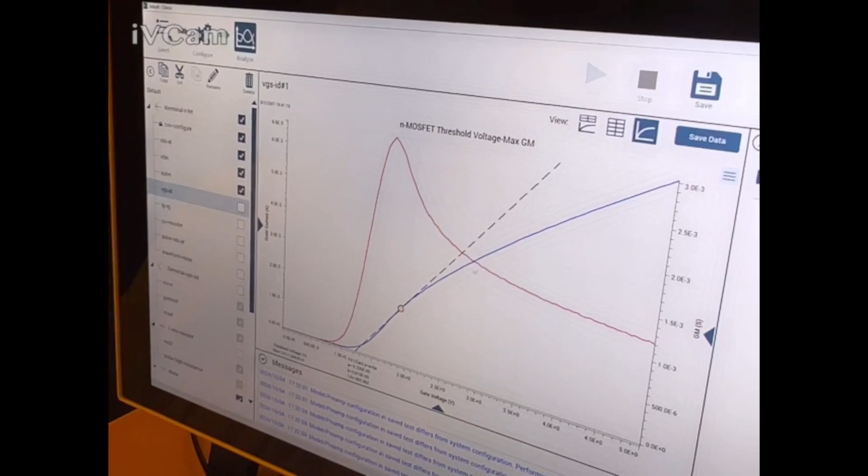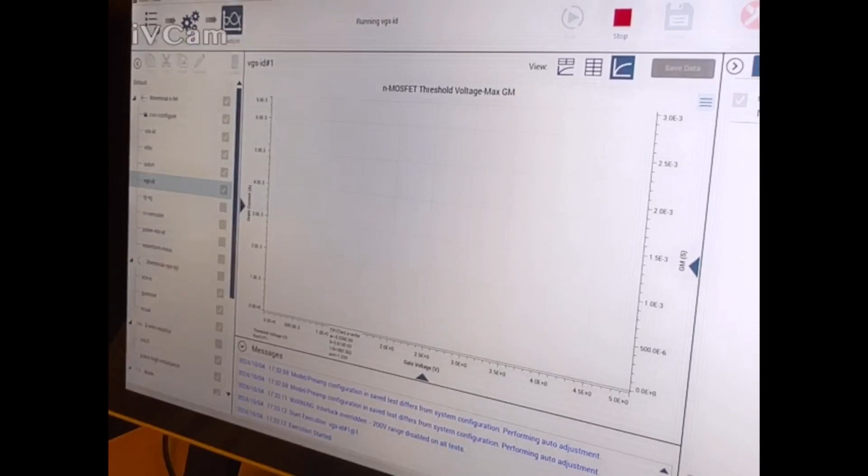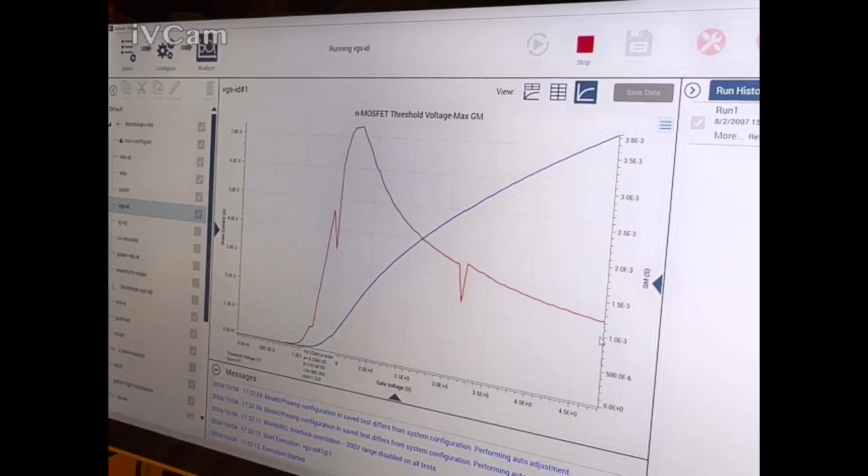VGS ID, similar, this gives you, this does some more calculations of transconductance and stuff like that. This I think should run too. This should run. You can see it shows any formulated values, it puts them on the graph automatically for you. Oops, I probably created some noise there or something. What is the red curve? I think that's the transconductance.

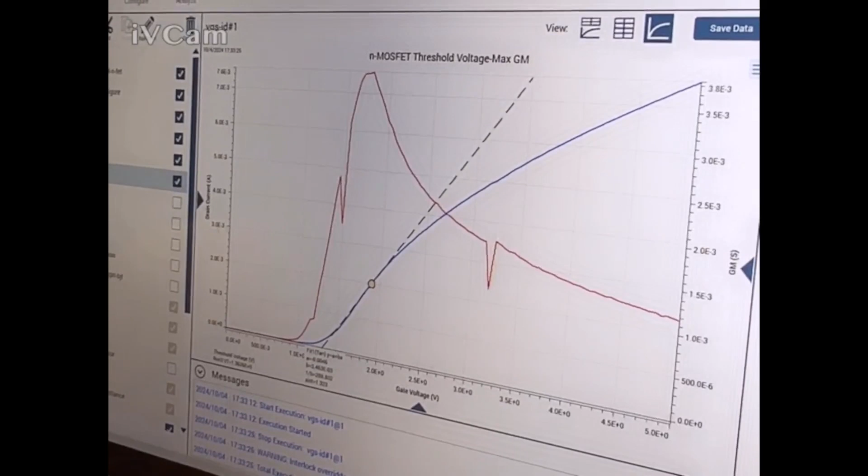Yeah, it's transconductance. Okay, so now I want to talk CV. Okay.